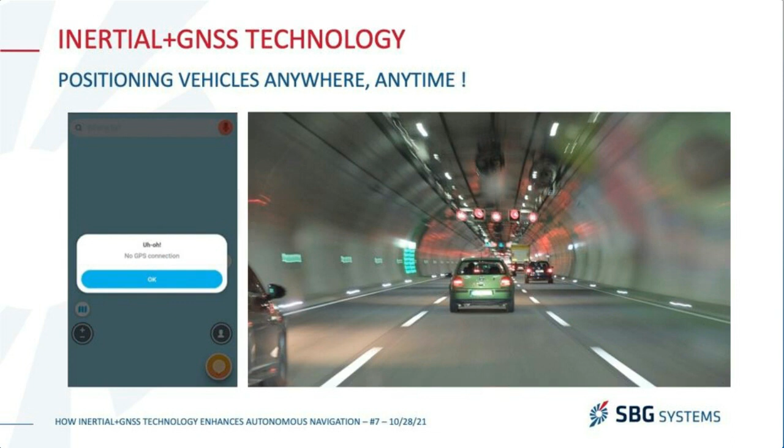However, you may have experienced yourself that under many conditions, we can lose GPS under tunnels, for example. You will be lost, but as you're driving, you can still position yourself in the right lane.

Other situations in the so-called urban canyons are other examples of challenging environments to position with GNSS. To operate correctly, a receiver needs to track several satellites, and getting only the minimum 4 in view will not be enough to get an accurate and robust position. Using multiple constellations is a necessity, but will not be sufficient in most cases, like the one pictured here.

How do autonomous cars drive in this condition? That is the challenge that we are here to solve. So what is our solution then? INS is a combination of multi-sensor data into one device that is fusing GNSS, of course, but also inertial motion sensor measurements and other information such as odometry to provide an accurate position at any time.

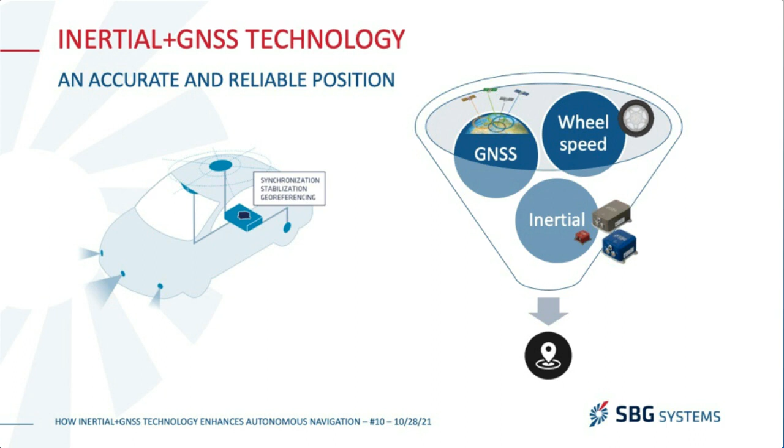For our GNSS source, we are using all 4 constellations, which maximize signal availability in GNSS complex situations for autonomous navigation in urban canyon, like we've seen before.

For precision, all our INS include RTK processing using either individual base stations or RTK network service and provide the expected centimeter level accuracy with immediate fixing thanks to the built-in multi-frequency receiver.

To ensure performance and build trust, we assemble our own IMUs from carefully selected industrial-grade parts. Then we calibrate all our products individually.

Units are placed in a thermal chamber on a multi-axis rotary table, cycling through the entire -40 degrees C to +85 temperature range. Yes, the calibration is applied over the entire temperature range and in the 3 axes of motion, plus a dedicated calibration report is made available to the customer.

We've made serious investments in the process and cutting-edge technology to guarantee IMU performance and stability over time and across samples.

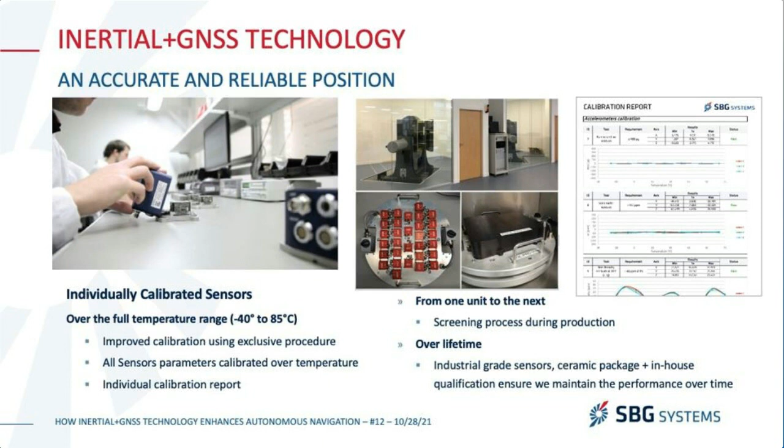More than just performant and accurate devices, we need integrity in positioning to deliver a trusted and reliable navigation for self-driving. Most applications have a maximum error budget and their requirement that we call the alert limit. It's then critical for a navigation system to report an estimated error that matches the reality to avoid misleading operations.

In the following diagrams, we show top left a reported error that is higher than the actual error and lower than the predefined alert limit. The system is then safe to operate.

Next right is a situation where the reported error beyond the alert limit is no longer acceptable. Real position error is still lower than the reported one, and the system is safely declared as unavailable.

Bottom left, the reported error is lower than the actual error. The situation starts to be dangerous, although real error is lower than user requirements.

And finally, bottom right, the situation is critical and misleading as the solution is declared available, but the real error is above user limits.

Those last 2 scenarios are the ones we never want to see. The integrity should be addressed at every step of the navigation chain, starting from the correction service used and ending at the navigation sensor side.

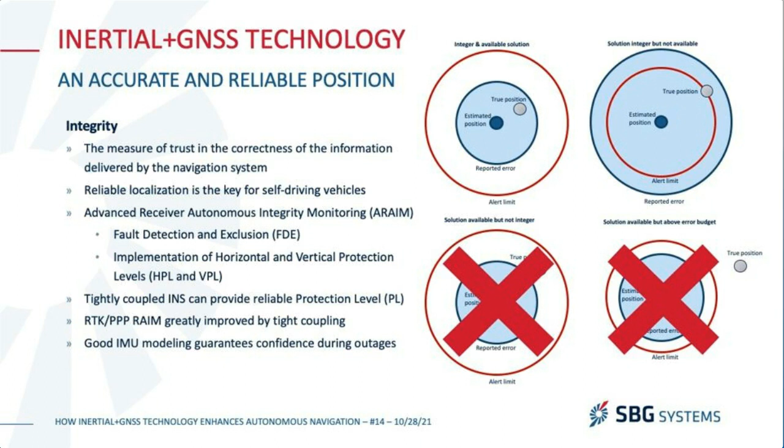In our case, on the receiver part, we achieve integrity implementing advanced RAIM, which is composed of a fault detection and exclusion algorithm and the computation of protection levels.

To assess integrity, we are commonly referring to the Stanford diagram. Looking at the 2 cases to be avoided as seen previously,

misleading information is represented by events situated below the diagonal of the diagram where position error exceeds the protection levels. Critical misleading information are contained in the area where events are also greater than the alert limit, that is the red square here.

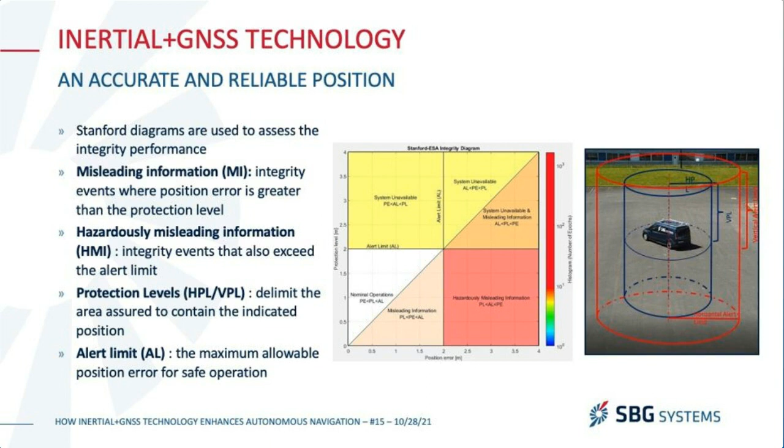Consequently, safe operations are represented by the white triangle area, and the yellow part depicts situation where the solution is declared unavailable.

Let's conclude here looking at some experiments conducted in real-life environment, consisting of an automotive test scenario in a deep urban area located in the business district of La Défense, west of Paris.

We have here the SBG System test vehicle equipped with two devices under test: a GNSS-only automotive-grade multiband RTK receiver equipped with our FDE and protection level determination algorithm.

Second, an industrial-grade MEMS INS produced by SBG System, which is an RTK tightly coupled IMU with odometry input.

As for the reference system, we've been using a high-quality fog-based INS with odometer and subsequently post-processed kinematic. Then we've compared the result obtained in GNSS only versus tight coupled solution.

On top, the GNSS only measurements are all scattered in the upper diagonal part of the graph with outliers of few hundred meters going well above the alert limit, still contained with the calculated protection levels. That solution is indeed not suited for self-driving.

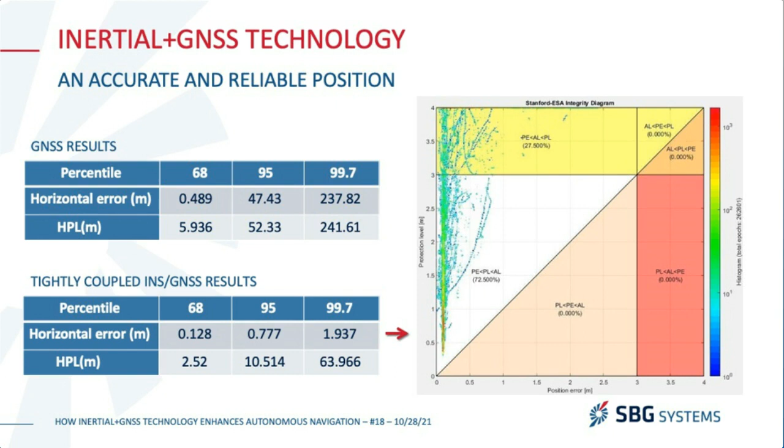However, this solution alone, if delivering reliable positioning, isn't accurate enough to satisfy self-driving in most severe conditions. That is why it is necessary to complement the solution with the integration of supplementary sensors such as cameras or LiDARs.

Integrating all these instrumentation to satisfy the perception stack of an autonomous vehicle can be a complicated task, considering that you have a number of multiple sensors to put together: LiDAR, radars, and cameras.

Then it comes a time to have them connected, and most importantly, to have them precisely time synchronized to create an accurate view of the environment, using PPS and NMEA-ZDA over various interfaces such as serial or the CAN bus, for example.

Cabling will quickly turn out to be complex, and you will rapidly face the nightmare known as the spaghetti cabling syndrome. Time synchronization is, however, critical in systems that involve multiple components in an autonomous vehicle, and setup must be carefully undertaken.

Besides these legacy interfaces, at SBG Systems we have also implemented UDP protocols for time synchronization over Ethernet of our INS and other connected devices on board. That will drastically ease the integration of vehicles with pre-installed Ethernet networks.

For time synchronization, we are offering the alternatives of both NTP and PTP time servers. PTP, if selected, is the most precise of the two. It is offering time resolution better than 100 nanoseconds. Our PTP solution is IEEE 1588 compliant and will seamlessly integrate in an all PTP-ready system.

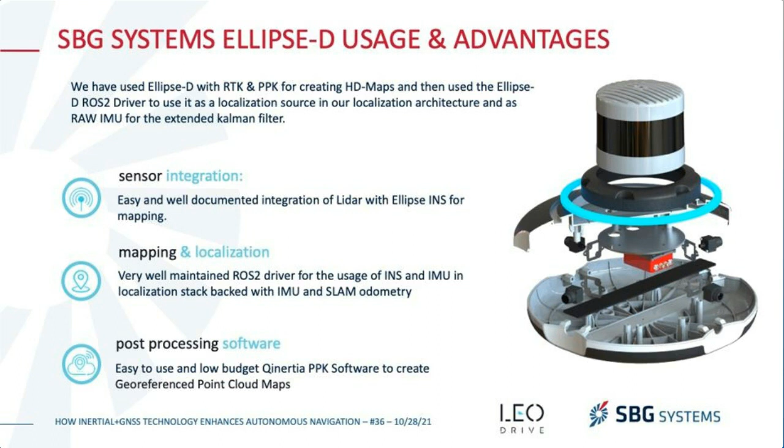So with having said that, I want to give the word to Fatih, our tech lead, who will describe in detail the technical usage of it. Fatih? Hello, I'm Fatih.

Here I want to explain what kind of data is being output from the SBG Qinertia software. So we use the SBG Systems Ellipse D product to create maps and aid in the real-time localization of the vehicle. In order to create the maps, we first record some data using the LiDAR and the GNSS. We then give the SBG logged binary data to the Qinertia software, and this Qinertia software post-processes this data using RTK and PPK and gives us the refined path of the sensor.

I want to go over some of the data that is being output from the Qinertia software. So these are the UTC time and date and the timestamp. These timestamps are given with microsecond accuracy, and also the GPS timestamp gives us the perfect time. It also gives us the rotation of the INS sensor in the world, and this is given in two ways: one of them is the quaternion data, and the other one is the roll pitch representation. Both give us the same rotation information, but the roll pitch has gimbal lock, so we don't use that most of the time.

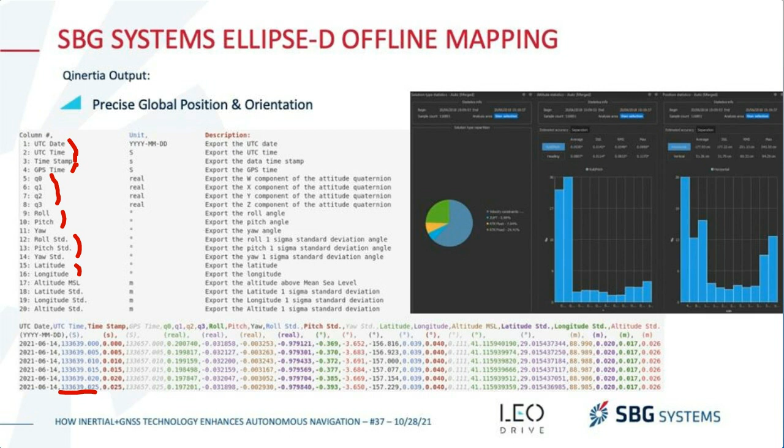Let's go to the next slide. Here I want to explain how we do the mapping using the data output from the Qinertia. First, we have two stored data types: one of them is the GNSS-INS data that we have seen before, and the other one is the LiDAR data. We record this from a VLS 128, and it's stored as a PCAP file, and it's synchronized with the GNSS-INS using the PPS and GPRMC messages and signals.

The PPS stands for pulse per second - every second it sends out an electrical pulse. The GPRMC message contains the current time and date to the LiDAR, and the LiDAR marks each individual point with a timestamp, so we are able to create a very, very accurate map. We have microsecond accuracy to perform this synchronization.

So here is the VLS 128, and underneath we have the IMU placed, the GNSS INS, and we have these two back antennas with 1.6 meter distance between them, providing us with about 0.02 degrees accuracy, and even lower with the Qinertia post-processing.

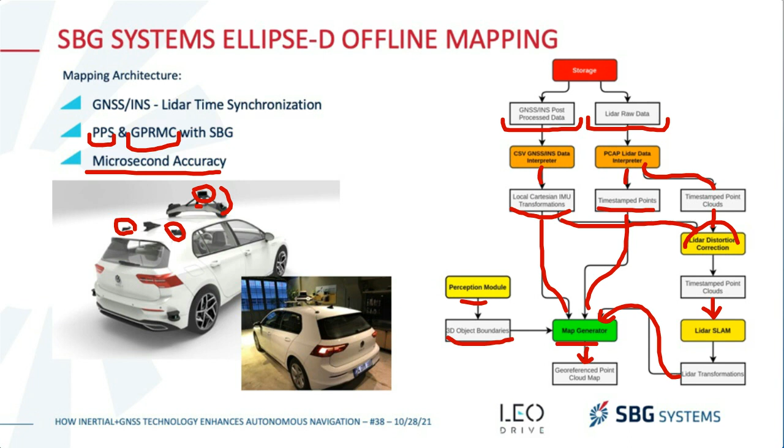Also, in order to get rid of moving or transient obstacles such as vehicles, we use the perception module to do object detection, and then remove them from the map. In the end, we have this georeferenced point cloud map to be used in the localization stack.

In the localization stack, I want to go over the localization stack currently being used in Autoware Auto. Autoware Auto uses ROS 2. First, we have the point cloud map, and in the point cloud map we have the points, and they are all georeferenced.

For the localization, first we have a point cloud map loader. This gets the map stored in the local drive and then publishes it to the NDT matcher node. NDT stands for Normal Distribution Transform, and it is used to locate a point cloud.

Like we have these green points here - these are the live points coming from a LiDAR, and the NDT algorithm tries to locate where this point cloud is located within the map. So it could be anywhere in the map, these points, but it does some feature extraction and matching, and it finds where the vehicle is.

In order to do this, we give it some prior information. So we give it the GNSS data, for example, and it serves as prior information used to initialize the NDT matcher. This NDT matcher also requires the real-time point cloud.

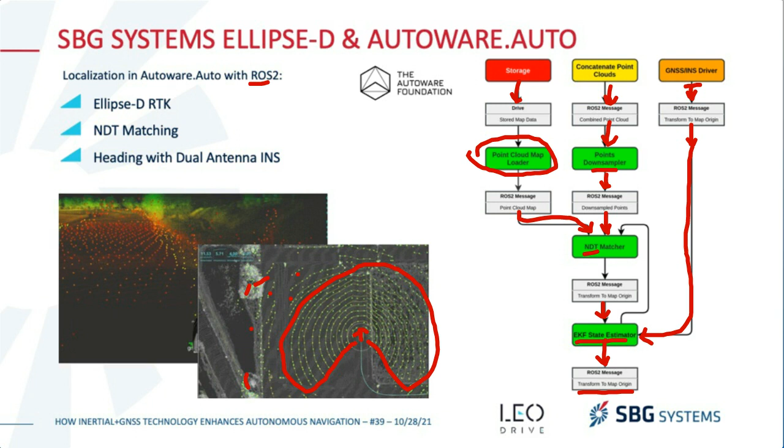We don't hear you right now if you're talking. Nicolas, are you there? Hello, can you hear me? Yes, we can hear you now. Okay, I switched the audio source.

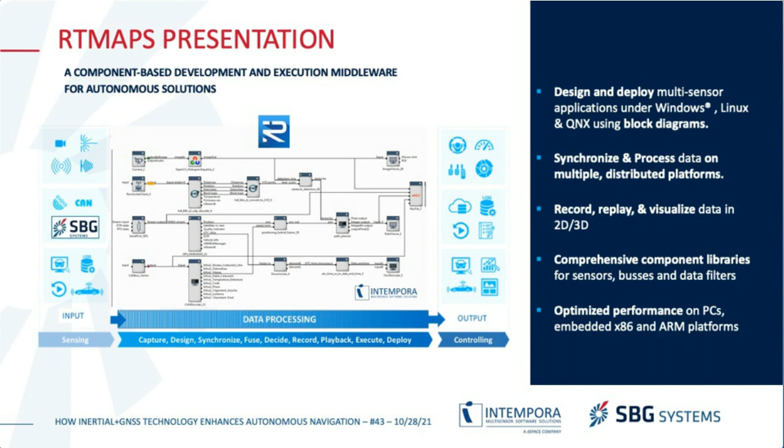A short RTMaps presentation - RTMaps really, as I mentioned, stands for Real-Time Multi-Sensor Application, not real-time maps; the name is quite misleading. It's a development, design, and execution environment for multiple data stream applications, proposing a component-based approach. So based on available components, you can acquire data from different sources. So here we should have a video, right?

Is the video on here?

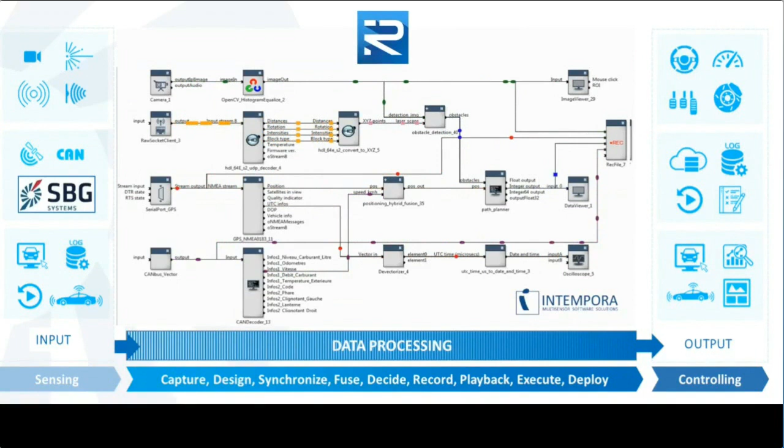Here you can see on the graph that you can drag and drop components, connect them together with connections to establish different data flows. The data streams from multiple sources will execute in parallel and be processed in parallel in multi-core and multi-CPU architectures.

RTMaps comes with an easy-to-use development environment. It's really made for automotive engineers, mobile robotics engineers, and not software specialists. Thanks to the graphical design environment, it comes with a comprehensive library of off-the-shelf components and interoperability components with multiple other tools such as MATLAB, Simulink, ROS, OpenCV, TensorFlow, and so on.

It's really made for optimized execution in real time. It also proposes capabilities for recording the different data streams from different sensors that are captured, and being able to play them back in a correlated way to simulate the presence of the real sensors and work offline.

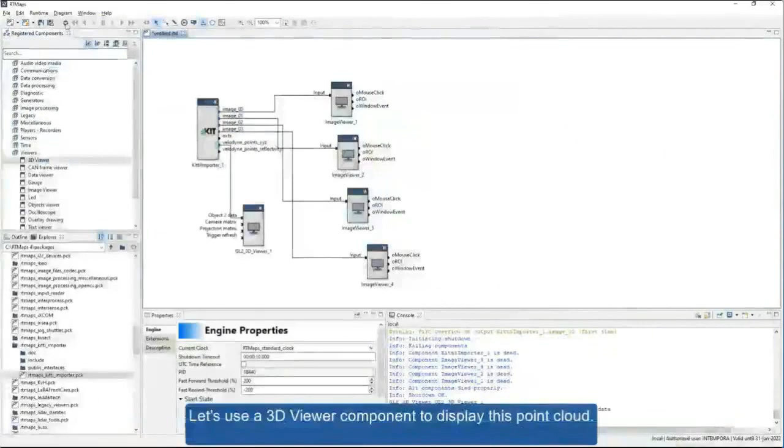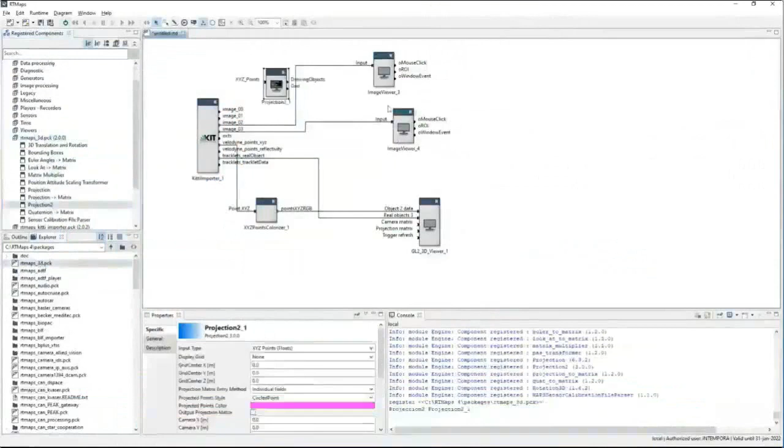The next slide is a short presentation, an accelerated video of how it looks like, where you can see components being instantiated and connected together, with execution starting right away when launching the data streams. You can manipulate and work with camera data, multi-cameras, multi-lidars, radars, positioning systems, etc., without writing code.

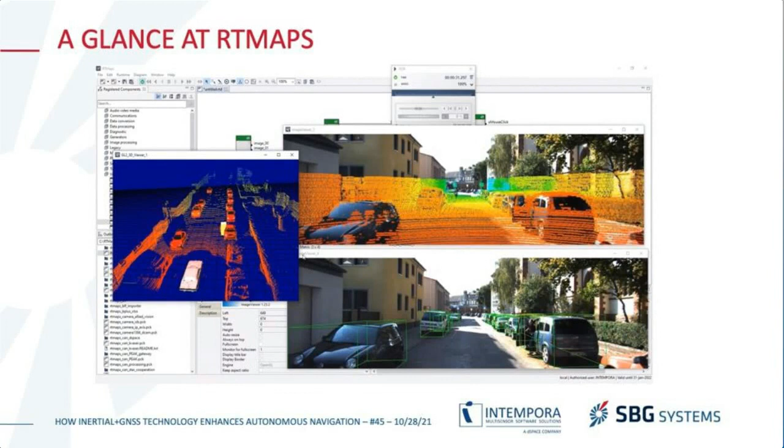You can, of course, design your own components and write your own features in C++ or in Python, or even in the form of Simulink models, from which you would generate code directly in the form of a compiled RTMaps component.

In terms of use cases, several use cases can be addressed with RTMaps. Simple applications such as data collection, which just consists in capturing data from multiple sensors. This can be done on different kinds of platforms: lightweight platforms, industrial PCs, or high-performance data recorders, here the AUTERA system from dSPACE with up to 50 gigabits per second and 32 terabytes of built-in storage.

RTMaps can be used to run and execute the real-time software for autonomous driving vehicles of different kinds and robots. So in real time, capturing the data, running the processes, fusing the data, positioning the vehicle, running the different algorithms and performing the command control. It can also be used on other kinds of complex systems with multiple sensors.

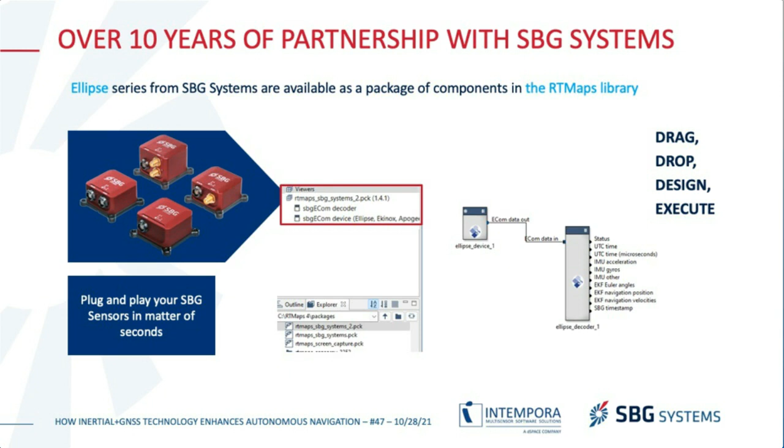In terms of execution performance, with RTMaps we focus on ease of use and execution performance. Note that RTMaps does not introduce hardly any CPU overhead. It's based on single process execution, multi-thread execution with intra-process memory sharing, so components just exchange pointers asynchronously. There are no memory copies, no dynamic memory allocation during execution, based on pre-allocated buffers.

That means RTMaps will really take the most out of your computing infrastructure, using the computing capabilities just to run the algorithms and not the middleware itself, which is not the case for other architectures. Performing benchmarks at different configurations for data capture and logging with high bandwidth sensors like HD cams, you can measure that the difference in CPU consumption is significant, up to a point where with different designs, it becomes difficult to keep all the data, and data is missed.